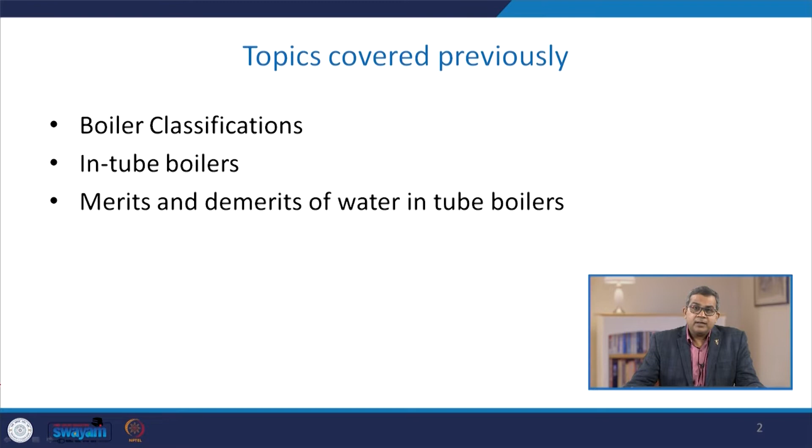let us have a look at what we had discussed in the previous lecture. Previously, we discussed about the basic classification of boilers, the different types of boiler classification like fire tube boiler and water tube boiler. Different types of boilers may be based on the pressure, the fuel, or other aspects. We discussed the tubing system of boilers and the merits and demerits of water tube type boilers.

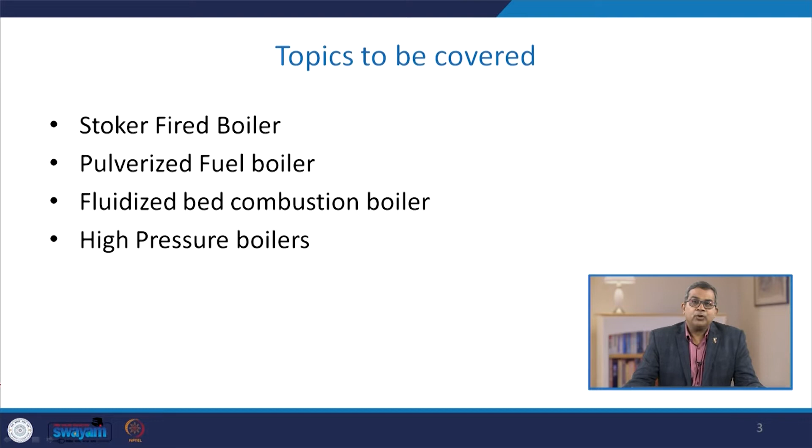In this particular lecture, we are going to discuss about the concept of Stoker Fired Boilers. We will discuss about the pulverized fuel boiler - pulverization is a very common phenomenon in chemical engineering. Then we will discuss about the fluidized bed combustion boilers, again to maximize the efficiency of the boiler. These are the different types of boilers. We will also discuss the concept of high pressure boiler.

Now see, when we talk about the boiler, the first question usually comes in our mind is whether this particular boiler meets our requirement pertaining to the energy, the steam, and other aspects for which they are designed. Second aspect is the efficiency of the boiler with respect to the energy, because everywhere you require the fuel, so we need proper efficiency for maximization of fuel economics. The third aspect is attributed to the environment - what is the composition of flue gases, how much flue gases are there - and this all depends on the choice of fuel as well as the boiler design used.

So based on this particular aspect, different types of boilers and different inner configurations or anatomy of the boiler have been devised. Now, Stoker Fired Boiler is one of that particular anatomy of the boiler. Usually these stokers are classified according to the method of feeding the fuel to the furnace and by the type of grate. We are having different choices of fuel - one of the best choices is coal, and how we are feeding this particular coal or fuel to the boiler is based on this Stoker type of thing.

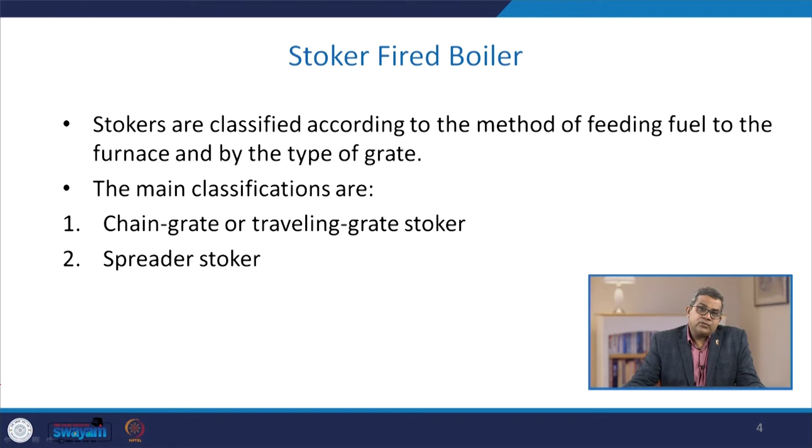Now, see, it is a simple combustion process. For combustion, what you require is a source of carbon, which is supplied by the coal. Second is the adequate supply of oxygen, and obviously in the boiler system we are using air as a source of supply. So this particular combustion process releases energy, and whether it is complete or partial combustion, it produces some sort of ash.

Now here you see there are certain air seals, air compartments, etc. All these things are mentioned over here to maximize the combustion process, because ultimately we had already talked about the energy efficiency aspect. So if there is incomplete combustion, obviously your boiler efficiency will be on the lower side.

Now here you see that some degree of skill is required, particularly when we are setting up the grate, air dampers and baffles, because usually baffles are used to ensure clean combustion, leaving minimum unburnt carbon in the ash. Otherwise, it may pose an environmental problem as well as create a non-economical operation of that particular boiler.

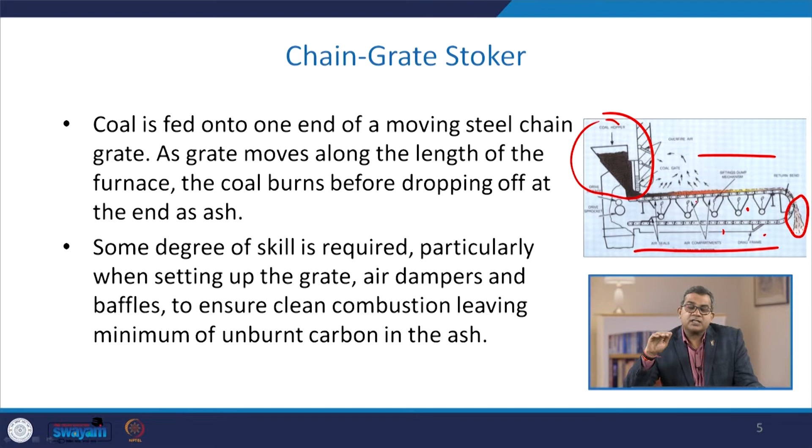Now, the coal feed hopper runs along the entire coal feed end, you see over here, to the end of the furnace.

Now, a coal grate is used to control the rate at which coal is fed into the furnace. If the rate is on the higher side, you may experience a certain amount of unburned coal. To control the thickness of the coal bed and speed of the grate, this particular grate is used, because if the bed size is too large, there may be a chance of formation of a stagnant zone, and these stagnant zones may create unburned coal.

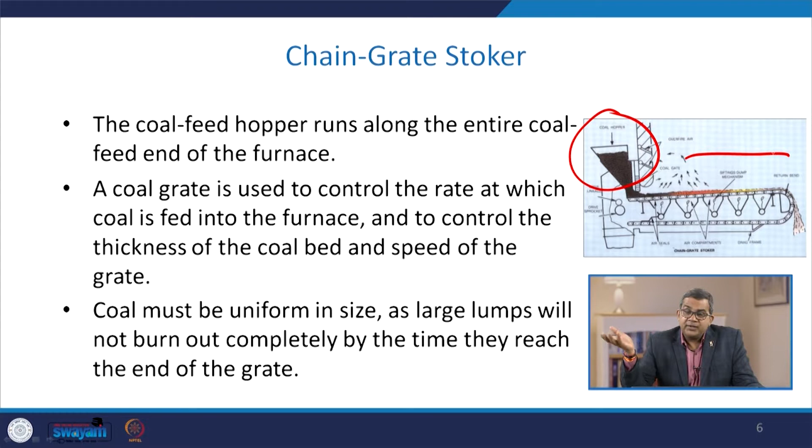Apart from this, another requirement is that the coal must be uniform in size. Large lumps may create the problem of unburnt carbon, and sometimes it may be very difficult to burn them completely till they reach the end of the grate. So, these are the complexities.

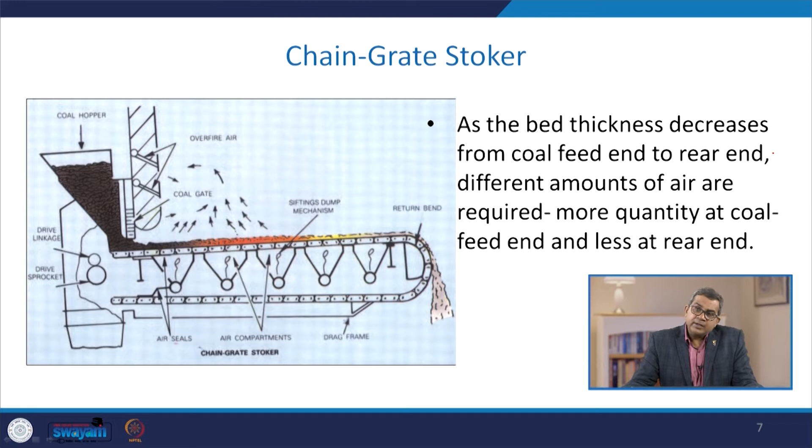Now, as the bed thickness decreases from the coal feed end to the rear end, different amounts of air are required - more quantity at the coal feed end, less at the rear end. When we talk about the combustion process, we are feeding air, and air sometimes costs. So, optimized supply of air is quite essential, and whenever there is a depletion in the amount of coal, you can alter the supply of air to the boiler system.

Now, let us talk about the spreader stoker boiler. The spreader stoker utilizes a combination of suspension burning and grate burning. Usually suspension burning offers higher surface area, and in that case the combustion efficiency is on the higher side.

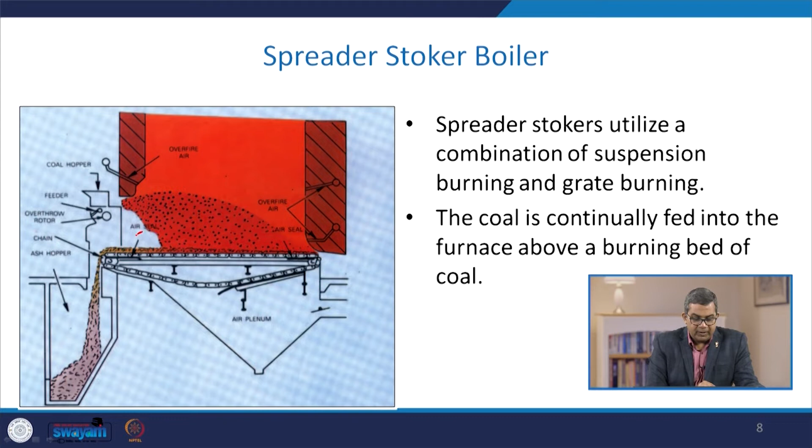So, the coal is continually fed into the furnace above the burning bed, you can see over here, and the coal fines or fine particle coal are burnt in suspension. The larger particles fall to the grate over here, and they burn in a thin and fast burning coal bed.

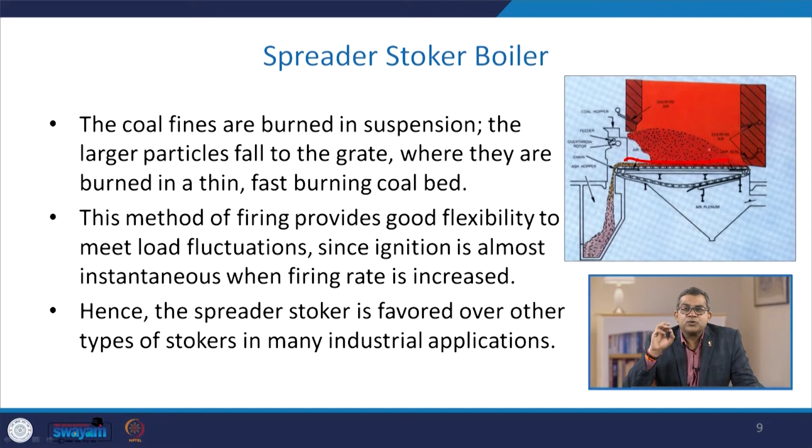Now, this method of firing provides good flexibility to meet load fluctuation, since ignition is almost instantaneous when the firing rate is increased. Therefore, the spreader stoker is favored over other types of stoker in many industrial applications.

Now, let us talk about the pulverized fuel boiler. Most coal fired power station boilers use pulverized coal, and many of the larger industrial water tube boilers also use this pulverized fuel. Nowadays, this technology is well established or well developed, and there are thousands of units around the world accounting for well over 90% of coal fired capacity.

So, what is the concept? The coal is ground or pulverized to a very fine powder, so that less than 2% is plus 300 micrometers, and almost 70 to 75% is below 75 microns for bituminous coal.

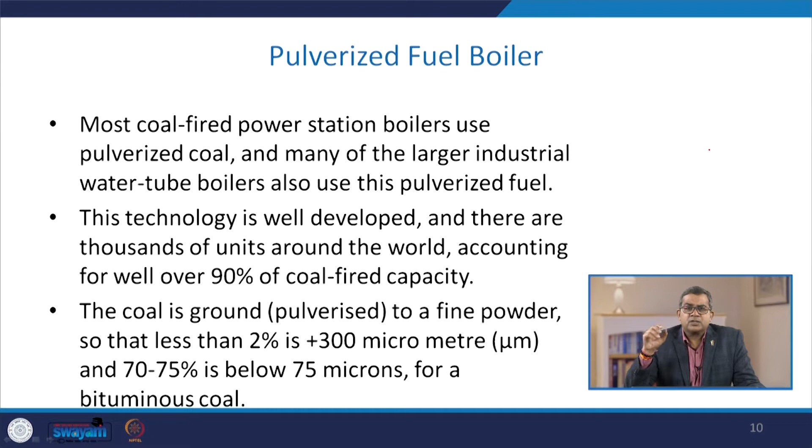Now, it should be noted that too fine a powder is wasteful in grinding mill power. You need to incorporate more and more power to make fine powder, and sometimes it may become charred over time. On the other hand, if you have too coarse a powder, it does not burn completely in the combustion chamber and results in higher unburned losses.

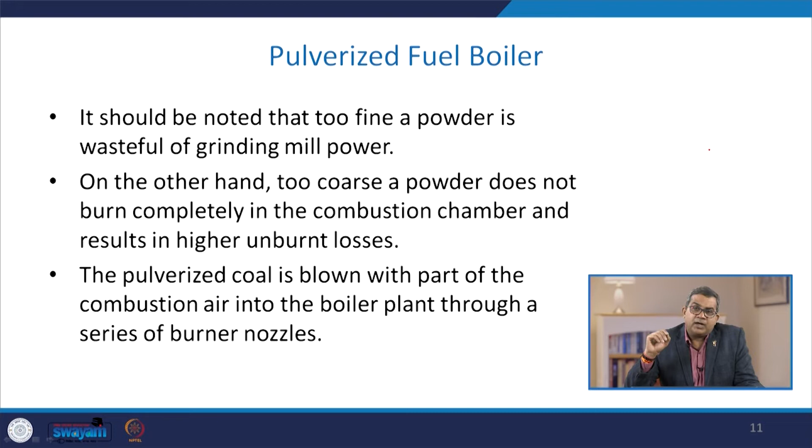So, the pulverized coal is blown with part of the combustion air into the boiler plant through a series of burner nozzles. Sometimes you may need to incorporate secondary and tertiary air, which may be added in the combustion process.

Now, combustion usually takes place at a temperature from 1300 to 1700 degrees Celsius, depending upon the quality or grading of the coal. The particle residence time in the boiler is typically 2 to 5 seconds. It is an art to maintain this residence time so that combustion efficiency may be enhanced, so the particle must be small enough for complete combustion to take place during that time.

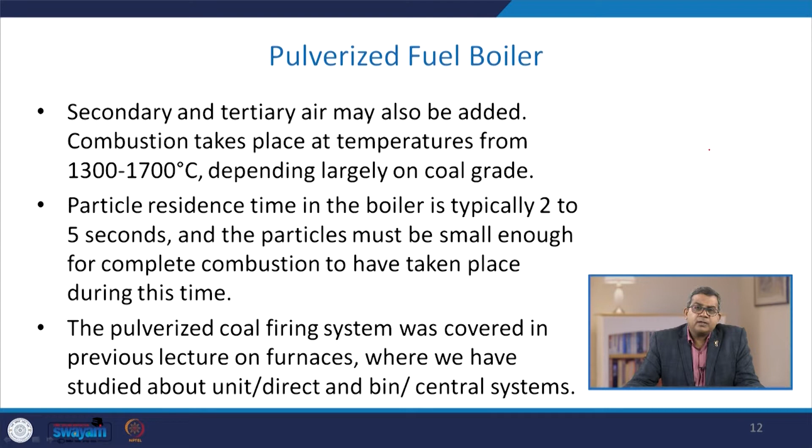The pulverized coal firing system was covered in the previous lecture, as you noticed on the furnace, where we had studied about the unit, direct bin, and central type systems.

This system has many advantages like ability for firing varying quality of coal, quick response to changes in load, and use of high preheat air temperature. One of the most popular systems of firing pulverized coal is tangential firing, using 4 burners corner to corner to create a fireball at the center of the furnace, enhancing temperature.

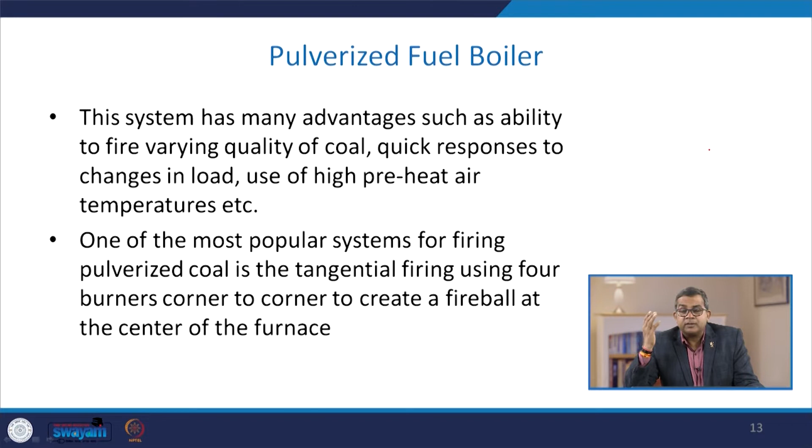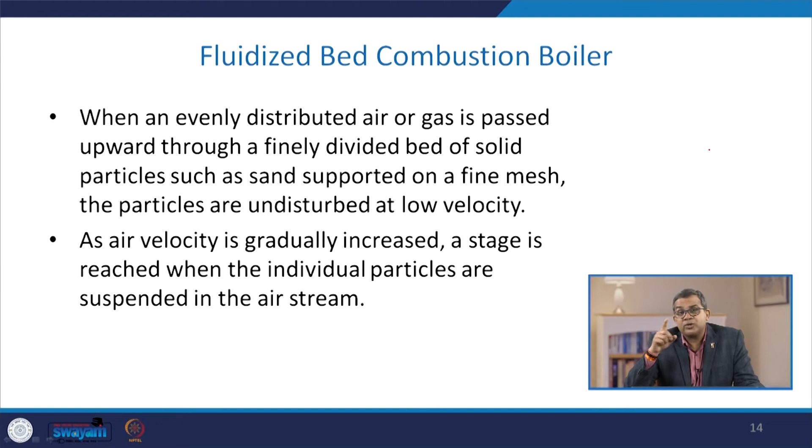Now let us talk about the fluidized bed combustion boiler. When an evenly distributed air or gas is passed upward through a finely divided bed of solid particles, such as sand supported on a fine mesh, the particles are undisturbed at low velocity. As you increase the air velocity gradually, a stage is reached when individual particles are suspended in the air stream, giving uniform distribution of air. If you further increase velocity, this gives rise to bubble formation, vigorous turbulence, and rapid mixing, and the bed is said to be fluidized. This is the usual phenomenon of fluidization.

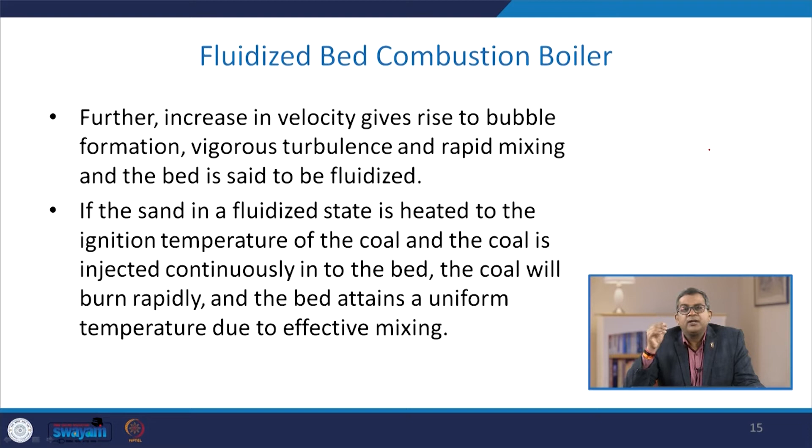If the sand in a fluidized state is heated to the ignition temperature of coal, and coal is injected continuously into the bed, the coal will burn rapidly and the bed attains a uniform temperature due to effective mixing. Proper air distribution is extremely important here, to maintain uniform fluidization across the bed. Ash is disposed of by dry and wet ash disposal systems.

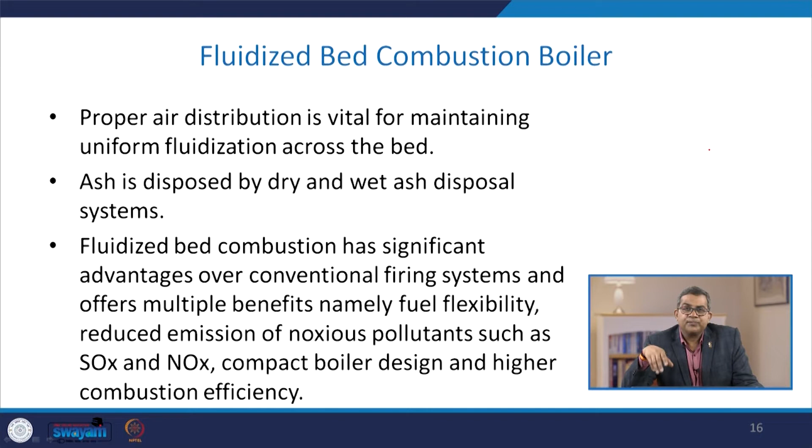Fluidized bed combustion has significant advantages over conventional firing systems and usually offers multiple benefits like fuel flexibility, reduced emission of noxious pollutants such as SOx and NOx, compact boiler design, and higher combustion efficiency.

Now let us talk about high pressure boilers. These are very useful in various industrial operations, especially when you may require variation in pressure as per the choice of your process. In all modern power plants, high pressure boilers, usually greater than 100 bar, are universally used as they offer different advantages. One advantage is that the efficiency and capacity of the plant can be increased as reduced quantity of steam is required for the system.

If you require the same power generation, and high pressure steam is used, then you can enhance or reduce different parameters as per the requirement.

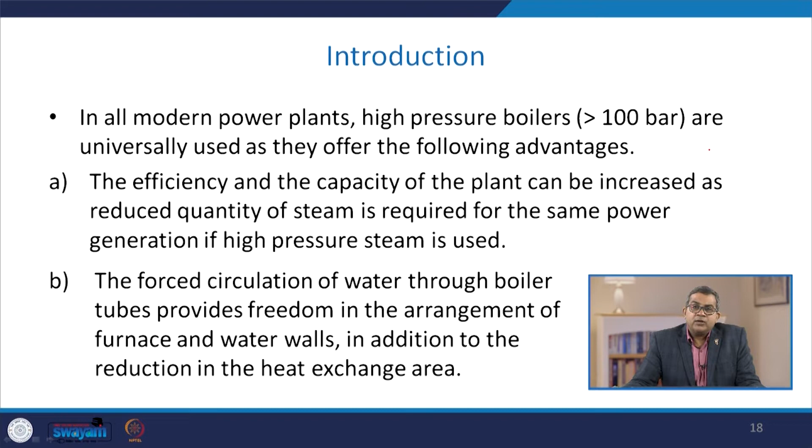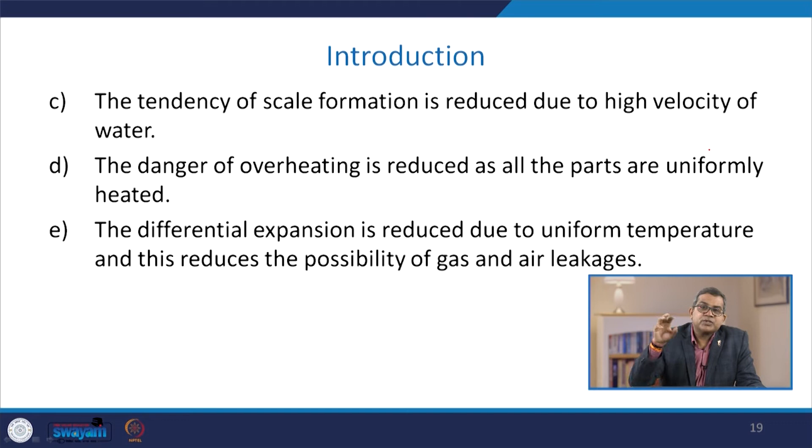The forced circulation of water through boiler tubes provides freedom in the arrangement of furnace and water walls, in addition to reduction in heat exchange area. The tendency of scale formation is reduced due to high velocity of water, so the deposition rate is substantially lower. The danger of overheating is also reduced as the parts are uniformly heated, so overheating, bending of tubes, shell, etc. can be avoided. The differential expansion is reduced due to uniform temperature, and this reduces the possibility of gas and air leakage.

If you are recirculating the steam or superheating it, there must be a sludge removal device. To maximize efficiency, you must have an economizer in place and a superheater. All these things are present in every type of boiler. The La Mont boiler is usually termed a forced circulation boiler, and it was introduced in 1925 by La Mont.

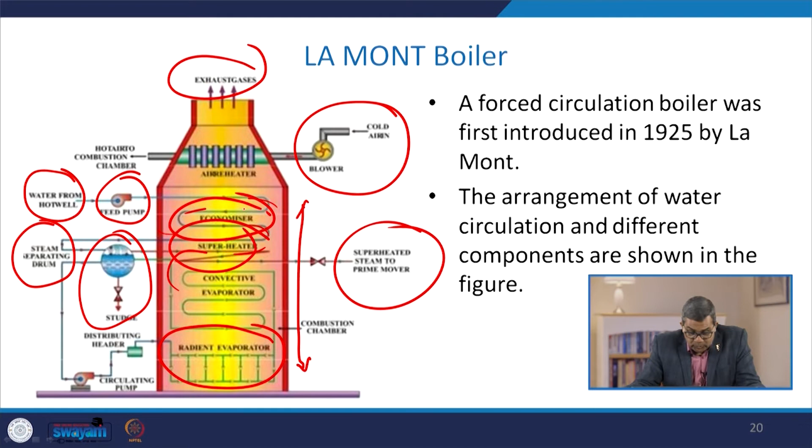The arrangement of water circulation and the different components have already been enlisted. You can see here there is a radiant evaporator, and the water passes through it, so it is being preheated as well as giving you superheated steam. Usually, the feed water from the hot well is supplied to the storage and separating drum, that is the boiler, through the economizer, and after the economizer it goes to the atmosphere or the air treatment plant. Most of the sensible heat is supplied to the feed water passing through the economizer.

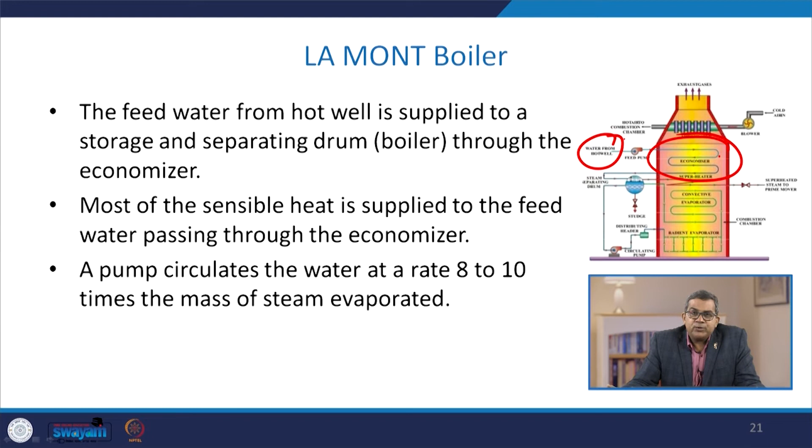Usually a pump circulates the water at a rate of say 8 to 10 times of mass of steam evaporated. That is the theoretical calculation.

Now, this water is circulated through the evaporator tubes. Here you see these are the evaporator tubes, and part of the vapor is separated in the separator drum. Now, the large quantity of water circulated, almost 10 times that of evaporation, prevents the tube from being overheated. So, this is a plus point because the bending of tubes or deformation of the tubes can be easily avoided.

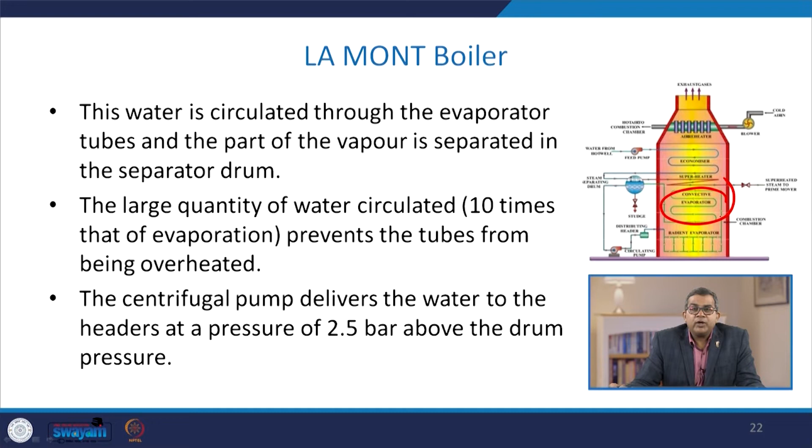Now, usually the centrifugal pump delivers the water to the header at a pressure of 2.5 bar above the drum pressure, and that is again a very plus point. So, the distribution header distributes the water through the nozzle into the evaporator.

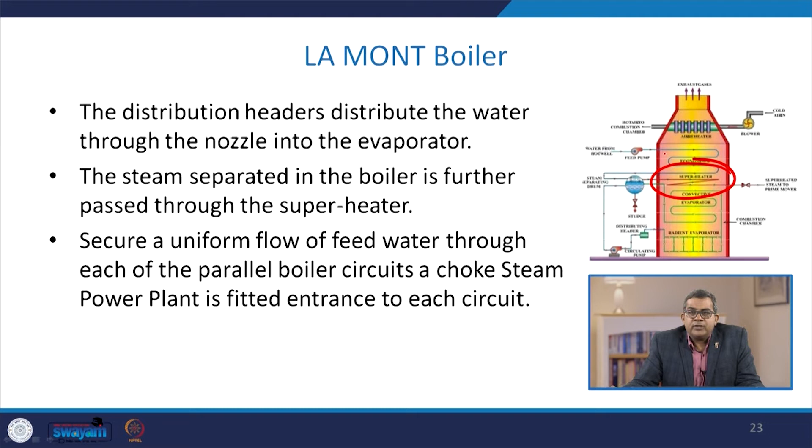So, the steam separated in the boiler is further passed through the superheater. Here you see this is the superheater. Now, to secure a uniform flow of feed water through each of the parallel boiler circuits, a choke is fitted at the entrance of each circuit.

Now, these boilers have been built to generate 45 to 50 tons of superheated steam at a pressure of say 120 bars, and the temperature usually is around 500 degree Celsius for different types of industrial uses.

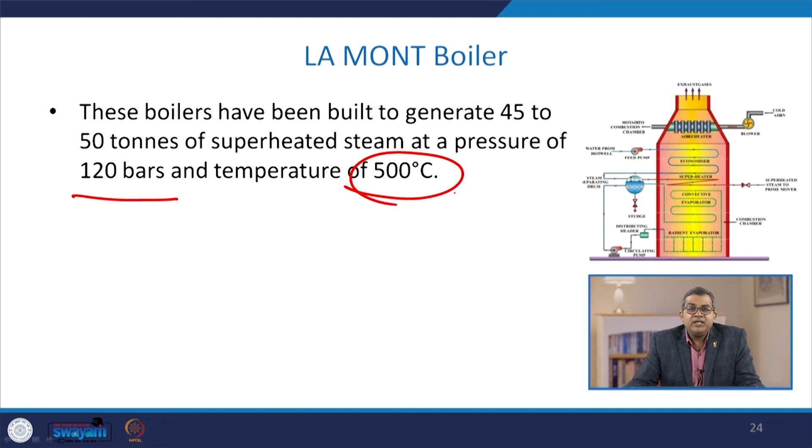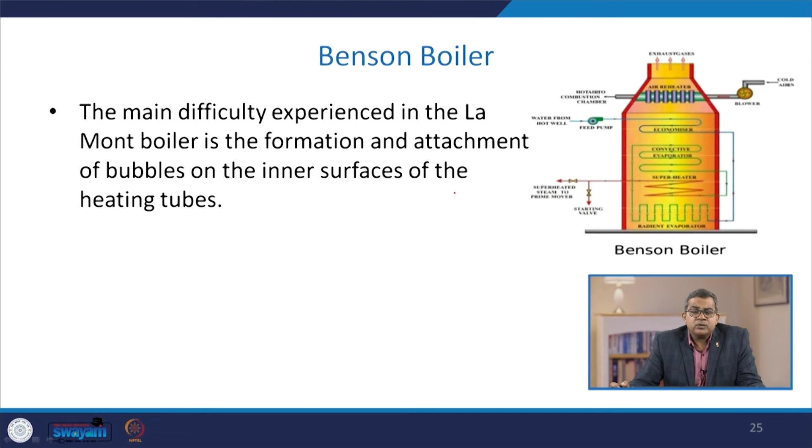Now, let us talk about the Benson boiler. The Benson boiler evolved somewhat later than the LaMont boiler, because the main difficulty experienced in the LaMont boiler is the formation and attachment of bubbles on the inner surface of the heating tube. This may cause corrosion and some foam formation. That is why the Benson boiler was evolved.

Now, the attached bubbles reduce the heat flow in steam generation as they offer high thermal resistance compared to a water film. So, if the boiler pressure is raised to a critical pressure of 225 atmospheres, the steam and water have the same density. Therefore, the danger of bubble formation can be completely avoided in the Benson type boiler. It was a very small phenomenon through which you can utilize and maximize the things. So, you see that from LaMont boiler to Benson boiler, the system evolved over a period of time.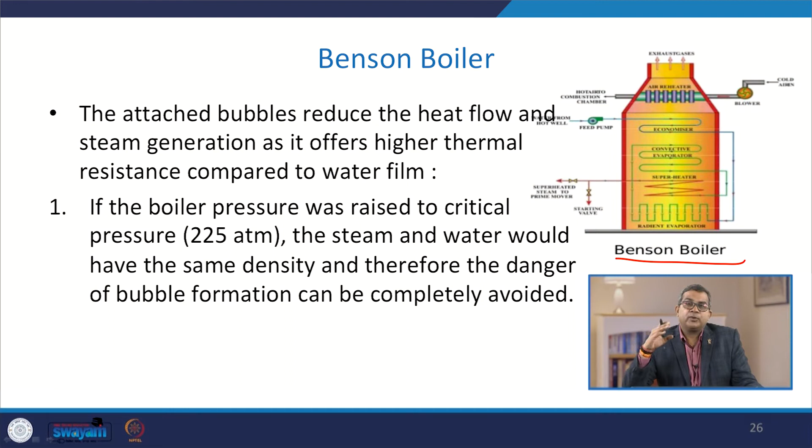Now, usually natural circulation boilers require expansion joints, but these are not required in the Benson boiler. If you are having expansion joints, the chances of wear and tear may be more prominent. So, the erection of Benson boiler is usually easier and much quicker than the previous one.

Now, the reason is that all the parts are welded at site and the workshop job of tube expansion is altogether avoided. So, these two added benefits they offer, and they pose a good candidacy of Benson boiler over LaMont boiler.

The transportation is again a very crucial aspect in the boiler system. The transportation of Benson boiler parts is easy because no drums are required, and the majority of the parts are carried to the site without pre-assembly.

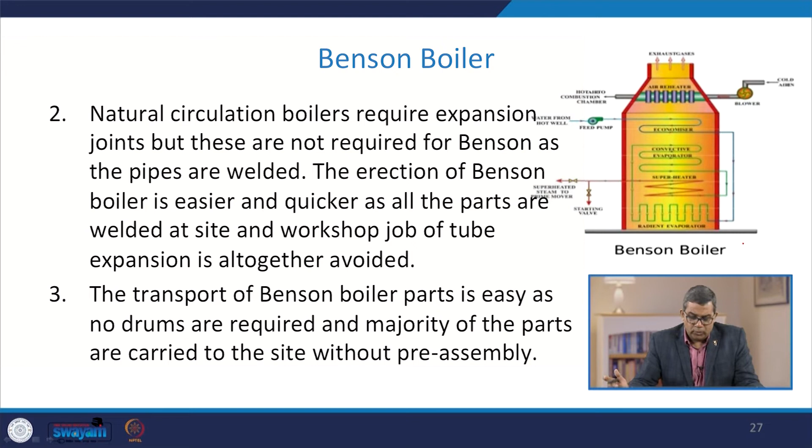Now, these Benson boilers can be erected in a comparatively small floor area. The space problem does not control the size of the Benson boiler; whatever Benson boiler you are using, it does not pose any kind of restriction.

The furnace walls of the boiler can be more efficiently protected by using small diameter and close pitch tubes. So, you can say the protection of this boiler with respect to safety can again be secured.

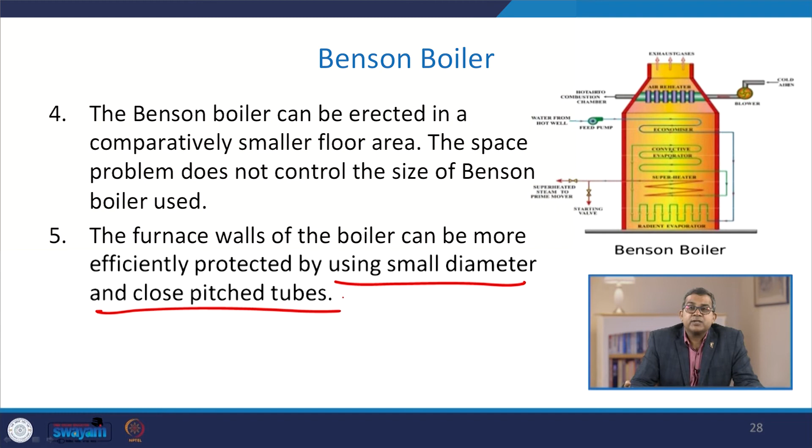The superheater in the Benson boiler usually is an integral part of the forced circulation system. So, therefore, no special starting arrangement for the superheater is required.

Now, the superheater is again sometimes a very useful attachment to the boiler to maximize efficiency, because sometimes if you are extracting the steam from the boiler and taking it externally to a superheater, you require some additional source of energy, and there may also be pressure drop, condensation—all these things may come together.

So this offers the in-house arrangement of superheated steam within the boiler system, and that is why it is again a very beneficial aspect.

Now, these Benson boilers can be started very quickly because of the welded joint. There is no expansion joint, so you may not experience any kind of leakage or other wear and tear problems, and you can start very quickly.

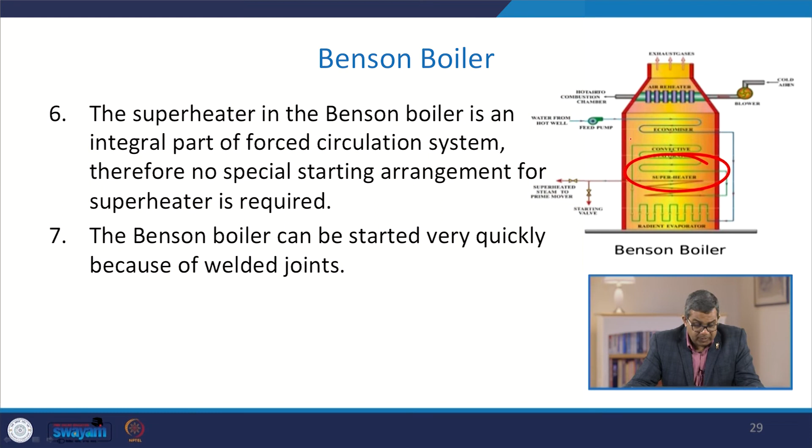Now, these Benson boilers can be operated most economically by varying temperature and pressure at partial loads and overloads. The desired temperature can also be maintained constant at any pressure. So you see that a lot of flexibility is attached to these boilers, and you may optimize the situation as per the requirement because the pressure and temperature can easily be maintained.

Apart from this, there are no expansion joints, so all these things are favorable. Now, sometimes during the process there may be a sudden fall in demand, and this sudden fall in demand creates a circulation problem due to bubble formation in the natural circulation boiler.

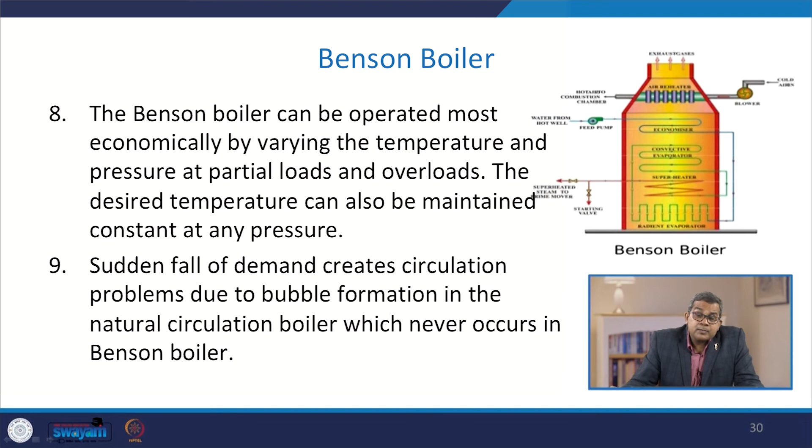This type of phenomena usually does not exist in the Benson boiler. So we may say that this particular phenomena never occurs in the Benson boiler.

This feature of insensitiveness to load fluctuation makes it more suitable for grid power stations, as it has better adaptive capacities to meet sudden load fluctuation. Usually this is a very sensitive phenomena, and sometimes major accidents may take place because of the overloading of these boilers. So these type of things are very sensitive.

Again, blowdown losses are very crucial for any kind of boiler operation. These blowdown losses of the Benson boiler are hardly 4% of a natural circulation boiler of similar capacity. This particular loss sometimes attributes to major economic loss in any kind of boiler, so if it is on the lower side, the boiler operation would be more economical.

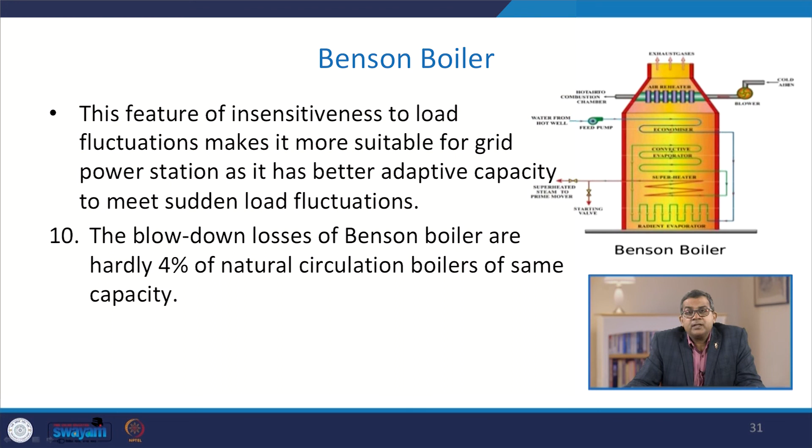The boiler safety is again a very crucial and important aspect, because the basic definition of a boiler suggests that it is a pressure vessel. So when we are dealing with a pressure vessel, there may be a chance of explosion hazard, and since it is a pressure vessel, the explosion hazard can sometimes be very severe. If you go to the literature, there are various boiler explosion accidents that created economical loss and also human fatality.

So if we talk about the Benson boiler, the explosion hazards are not at all severe, as it consists only of tubes of very small diameter and has very little storage capacity compared to drum type boilers. With very less storage capacity, the heat capacity would be on the lower side, and by this way the explosion hazard or consequences of any explosion are minimized.

Now, during the start, the water is usually passed through the economizer, evaporator, superheater and back to the feed line via the starting valve, so that whatever required energy or heat can be extracted and maximized, achieving maximized heat efficiency.

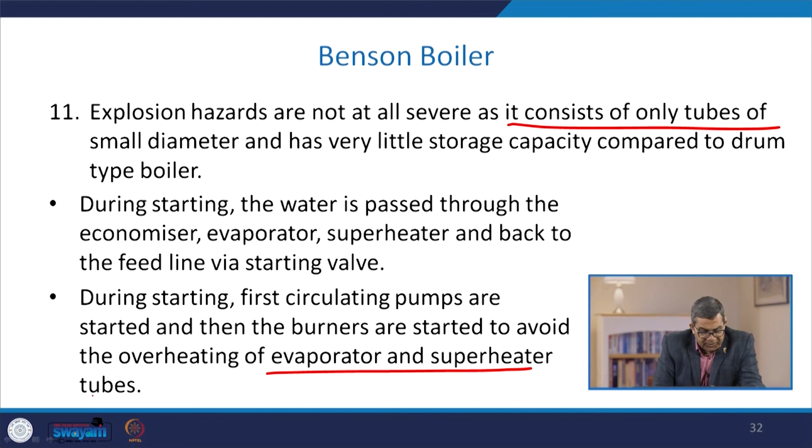Now, during starting, the circulating pumps are started first, and then the burners are started, to avoid any kind of overheating of the evaporator and superheater tubes. So these evaporators and superheaters pose a very smart phenomena of energy conservation.

So at the end of this particular lecture, we had discussed the Stoker type of system, and the classification of boilers with two different types like the Lamont boiler and the Benson type boiler. The basic objective of studying these different types of boilers is to cater to the need of your requirement.